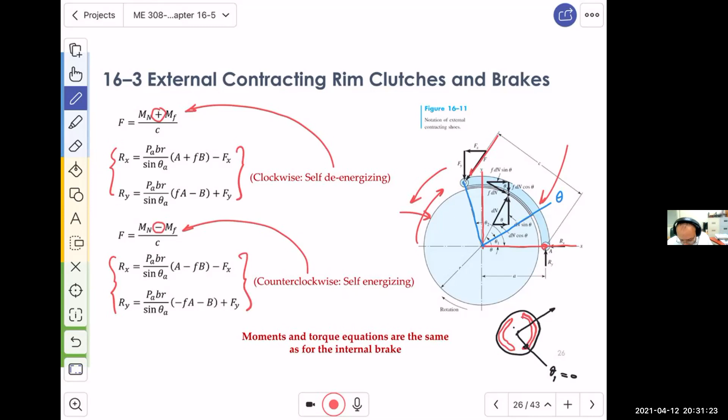Now let's go to this interesting problem. Looks very simple, very interesting, but it will teach you something very crucial. It says here: the block type hand brake. This is a hand brake, and as you see, you'll probably imagine this is your hand and you are pushing downward.

In the figure, it has a face width of B equal to 30 millimeter, and a mean coefficient of friction F which is 0.25, for an estimated actuating force of 400, so F equals 400 Newton. We want to find the maximum pressure on the shoe and find the braking torque. So basically we want to find PA and we want to find the torque. Of course, all dimensions here are in millimeter.

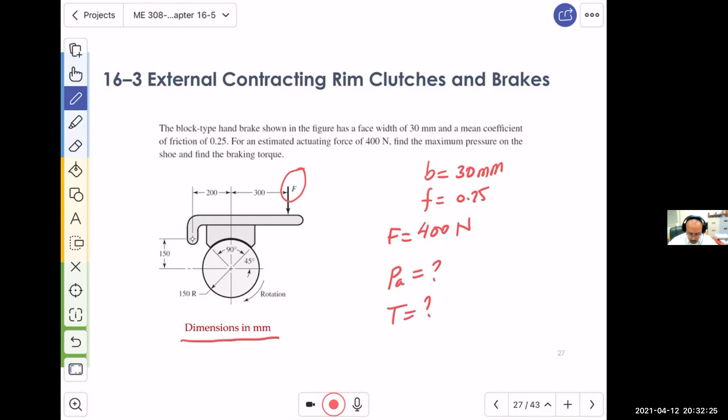So what I want you to understand is the following: we want to find, if we have F known, C can be measured from the geometry, and we know MF and we know MN, which are going to be functions of the maximum pressure. We will probably be able to find the pressure from this relation.

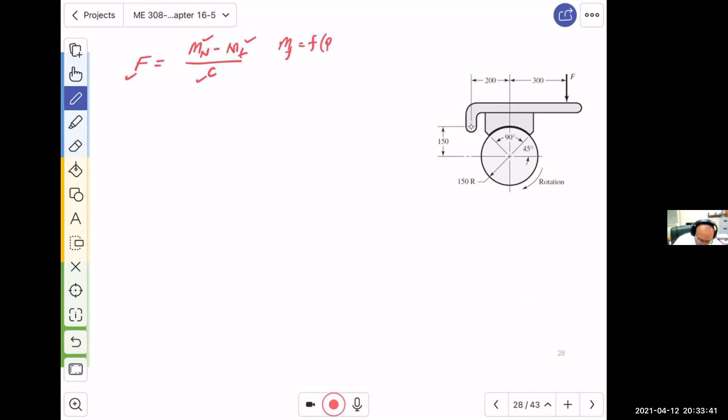So basically we can imagine that F is equal to mn minus mf divided by c. Then if we know mf, mn, c, and f, such that mf is a function of PA and MN is a function of PA, then we can find PA. Once we find PA, we can find the torque. There's no big deal about that. This is how we are going to plan the solution.

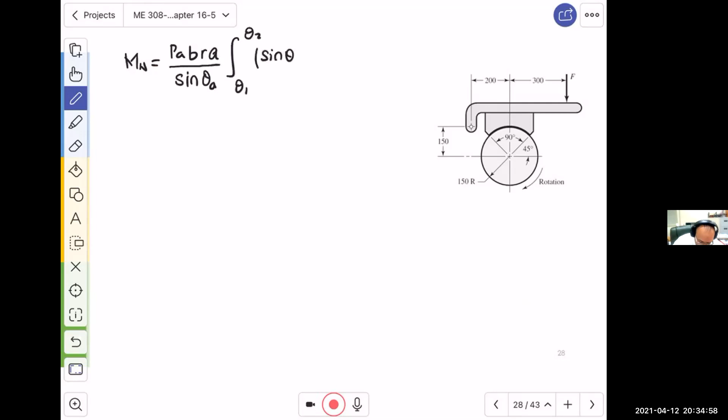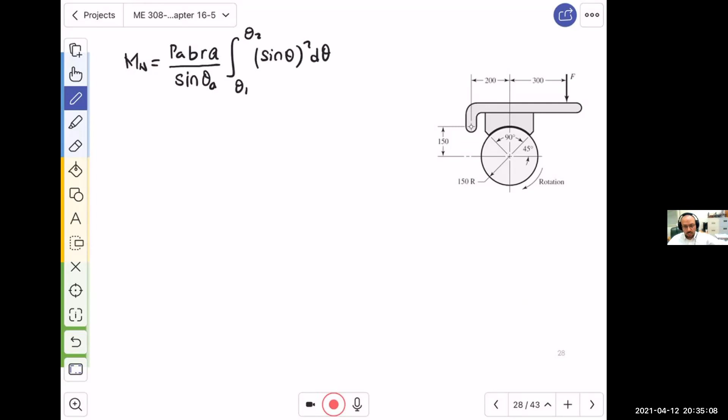Now, in the slide, I gave you the solution for this expressed as: this is equal to PA, B, R, A divided by sine theta A, and then this is equal to theta over 2 minus 1 over 4 sine 2 theta, evaluated from theta 1 to theta 2. Now, in the solution that I am going to provide, it was expressed automatically by integrating this, not by evaluating this, which is the same, right? It's the same.

Now, what is MF? MF is equal to F, the friction coefficient, PA, BR divided by sine theta A, and then the integral from theta 1 to theta 2 multiplied by sine theta multiplied by R minus A cosine theta d theta. Again, in the solution, you will see that we are going to express this in terms of the integration, which is not a problem. Now, the distance A — I ask you to think about it — is basically the distance from the pivot all the way to the center.

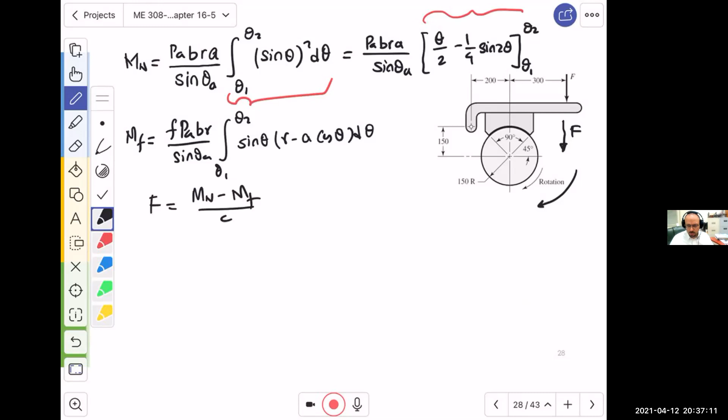This probably answers the question in your mind when I said F equals mn minus mf divided by c. Some of you might ask why I assumed it's minus when it looks like plus. It's because here we have a self-energizing system. If the force is on the other side, we would have a self-de-energizing system.

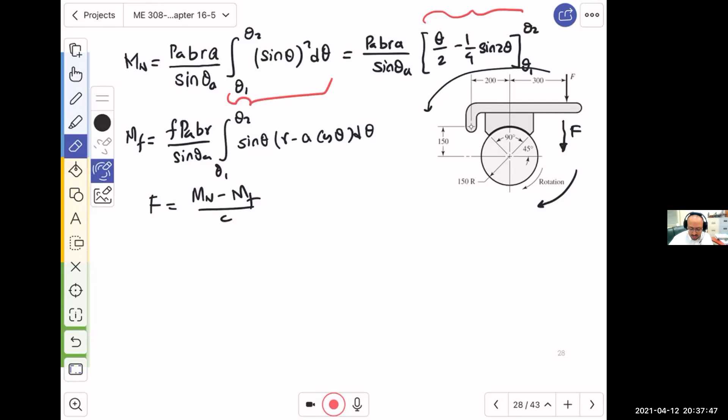Now let me clean all of this up. I want you to focus on what I'm going to show you next. I'll clean this and look at the integration limits. Whether you solve it by substituting the integral right away or by integrating first doesn't matter. What matters here is what is theta 1 and what is theta 2.

If you relate this to what I said, that the coordinate system must be oriented such that x passes through the pivot, then the coordinate system will look like this. This is x, and perpendicular to it, I will have y.

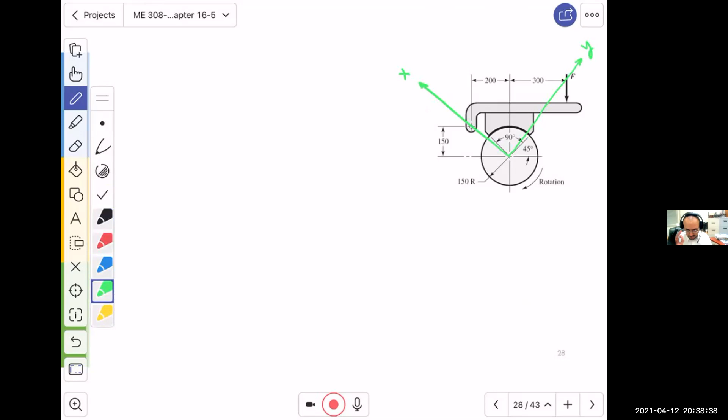I think you see where I'm getting to. It wasn't a coincidence that in reality theta 1 will be right there, with a little gap in between, and theta 2 is right there.

So the common mistake is someone will assume, as usual, that this is x and this is y, and say theta 1 is equal to 45, then theta 2 would be 45 plus 90, which is 135. So by mistake someone will think this is 135, which is wrong.

So now let me clean this yellow one, we don't need it. The green one is our coordinate system. So what is this angle then?

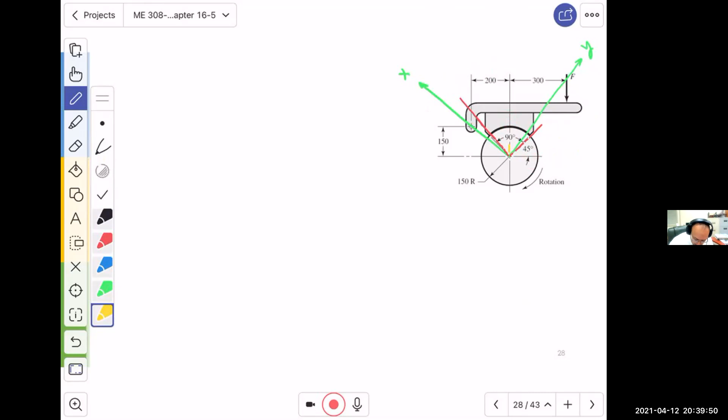If I know this angle, let me clean it up again and look at it. If this is 45 and this is 90, and this line is 180, how much is left? 45. So this must be 45. Now the green line will pass through here.

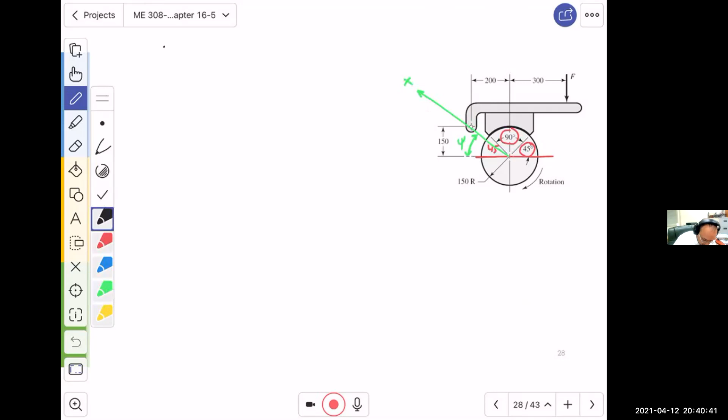So what I can say, if I find this angle, which let me call psi, and this is x, then theta 1 is equal to 45 minus psi. Isn't that true? I have the 45, I take from it that green angle, and what's left is this little distance from the green line all the way to the line of the first shoe. So theta 1 equals 45 minus that.

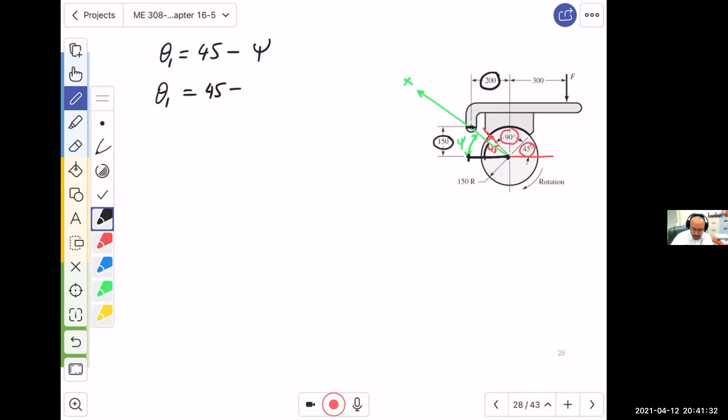So how much is this? Look carefully: this distance from here to there is 200, and the distance from here to there is 150. So tan psi equals 150 divided by 200. In other words, to find psi I take the tan inverse of 150 divided by 200.

If you do this, you end up with theta 1 equal to 8.13 degrees, that little tiny angle from x. So what is theta 2? Theta 2 will be 8.13 plus 90. That 90 is encompassing the shoe, but because we're measuring from the green x-axis, we need to add that 8.13.

So theta 2 is going to be equal to 98.13. That's it, this is very important, very important. So what is theta A? It is 90, that's a long shoe. So it is 90 degrees, and thus sine theta A is equal to 1, which is very helpful.

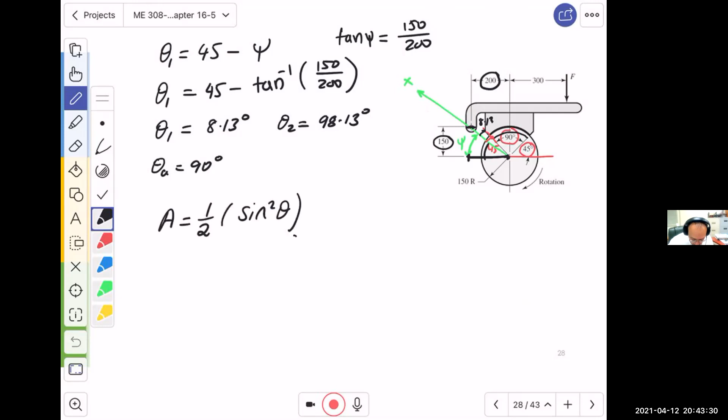Now, I told you the solution I'm going to show you is expressed in terms of the integral. So what did we do? We say A here is equal to 1 over 2 multiplied by sine squared theta, and then we evaluate this from 8.13 to 98.13, which is equal to how much?

What is C as a variable? It is the integral of theta 1 to theta 2 for sine theta d theta, which is equal to minus cosine theta, evaluated from theta 1 to 98.13, which is equal to 1.1314. You may ask, what are these, and where am I going to use them?

What is this? Let me quickly bring up the equation for you. Just give me one second, I'm pulling it out here from my note. So I want to remind you that MF is equal to F PA multiplied by B multiplied by R divided by sine theta A, and then multiplied by the integral from theta 1 to theta 2 of sine theta, and then sine theta is multiplied by R, minus A cosine theta d theta.

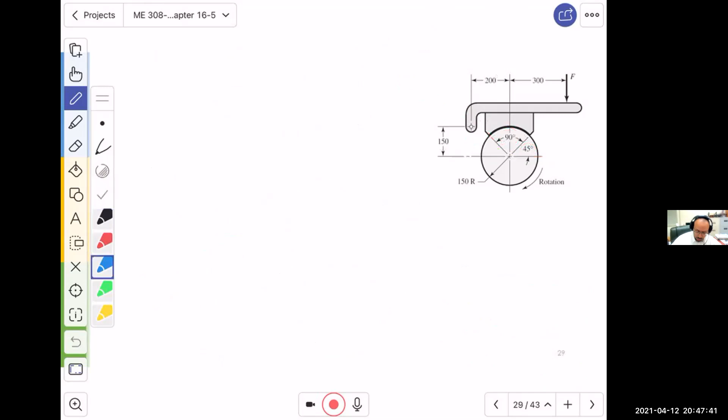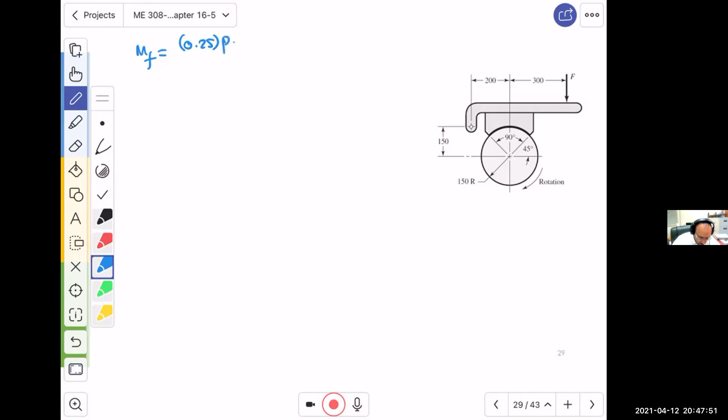Well, if you do this, and then you substitute, let me go here. Then I will get MF, which is equal to 0.25, that's the coefficient of friction, multiplied by PA, which is unknown, multiplied by B, which is 30 millimeter, which is 0.03 meter, multiplied by the radius. What is the radius? 150, so it is going to be 0.15. Divided by sine 90, and then we multiply it by R and by A.

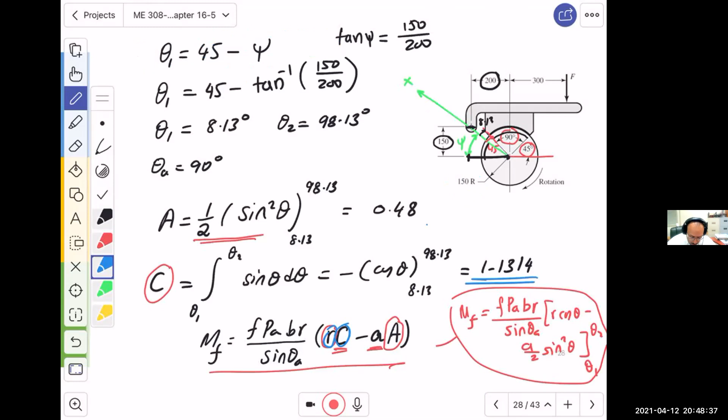So what do we have? If you recall, we said RC, C is 1.1314, and A is 0.48. So we will have R, which is 0.15, multiplied by C, C is equal to 1.1314, and then minus 0.25, which is, this is something you should not know yet, which is A, we did not calculate yet, multiplied by capital A, which is 0.48.

Now the question, what is A? If you recall, we said A is the distance between the pivot all the way to the center. Where is the pivot? It is here, that's the pivot. Where is the center? It is here. So you need to go and connect these two, and that's A.

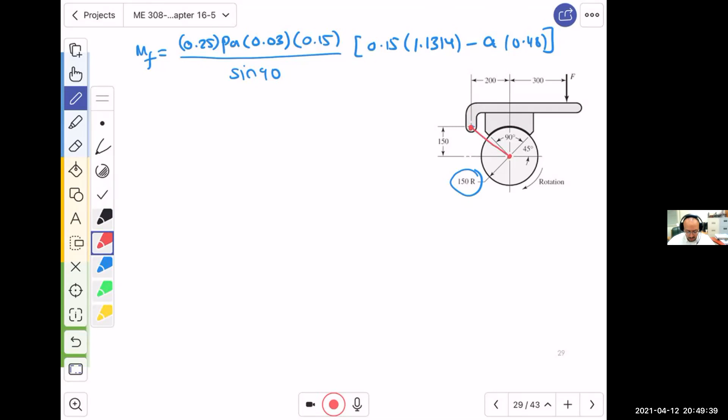So what is this? This one again is coming from 150 and 200, and it is the hypotenuse. So A indeed is equal to the square root of 150 square plus 200 square, and this is where I told you when I was explaining it, there is a 0.25. So the 0.25 is actually coming from this. This is 250 millimeter, which is 0.25.

So if I do that, what would I get? I will get MF, which is equal to 5.59 multiplied by 10 to the power minus 5, multiplied by PA, in Newton meter. Yeah, it's a Newton meter, it's a moment, and there is a pressure inside it, which is PA.

So what should I do? I should go to MN. MN has a parameter, which I'm going to call B. This is the same one as the one I showed you earlier, which is theta over 2 minus 1 over 4 sine 2 theta.

So what do I have to do? I have to substitute this, but be careful. I need to substitute theta as 8.13 divided by 180, just to remind you, because this has to be in radian. You understand? Or maybe you will make a mistake in the calculation. So let me tell you this. Maybe I should not do that, and I should do this instead.

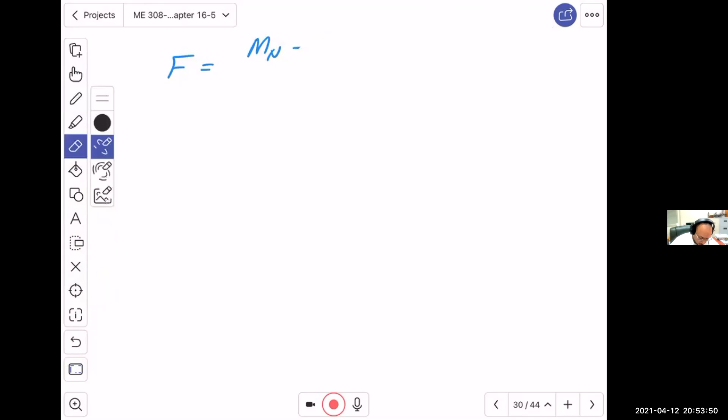Good, ya akhwan. I think I ran out of pages, so I'm going to add one over here. So what I'm going to do now, because, as I explained, this is a self-energizing brake. So I will have F, which is 400 Newton, equals to Mn minus M, where this M is Mf divided by C.

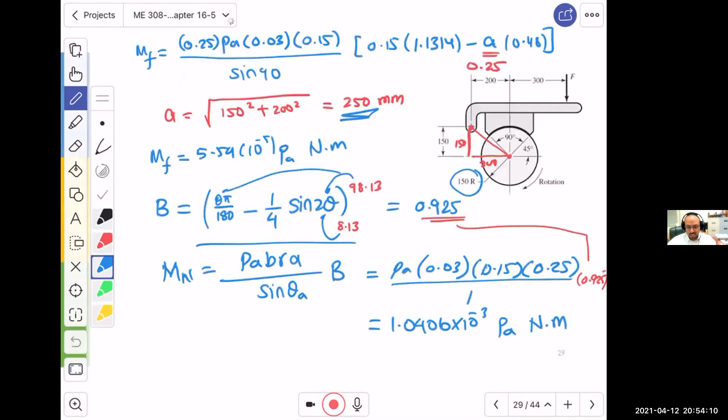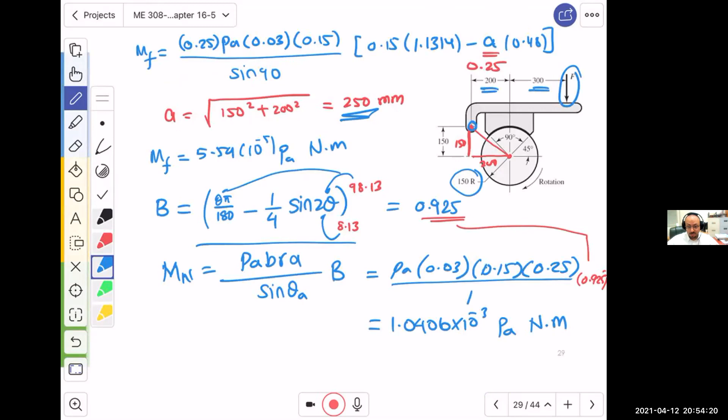So I have 400, which is equal to 104.06 minus 5.59, divided by C. Let's go and see what is C. C is the distance from the actuating force to the pivot point, which is 300 plus 200, so it is 500 millimeter. And if I divide it by 1,000, it's going to be 0.5.

Don't forget, this one and this one need to be divided by 10 to the power 5. That's why we have 10 to the power minus 5 in there. So when it is down, it's like dividing by 10 to the power 5, multiplied by pressure PA, which will give you the first requirement, PA equals to 203 kilo Pascal. That's the answer. Good, ya shabab.

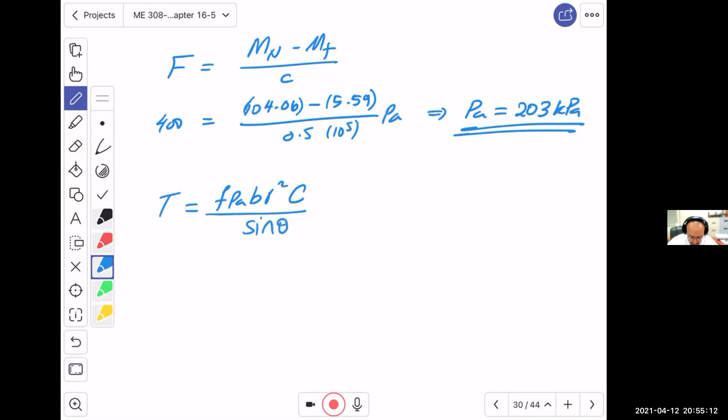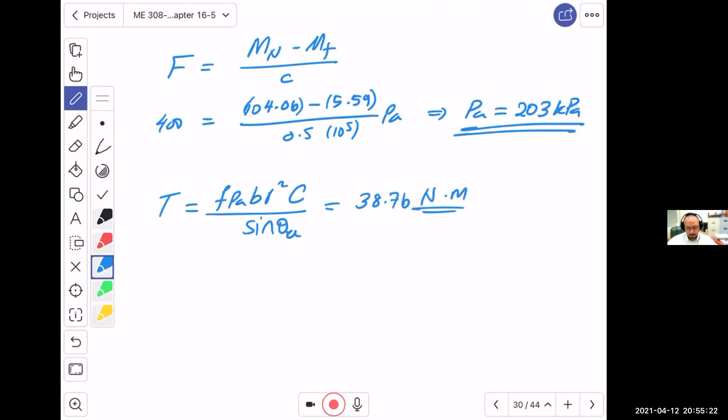So what is the torque? The torque equation is F, PA multiplied by BR squared multiplied by the C factor I calculated, over sine theta A. And if you substitute everything, because you know everything, you will get a torque of 38.76 Newton meter. Okay, that's it, ya shabab. So this is the solution. This is a problem from the textbook, but it is really an interesting one.

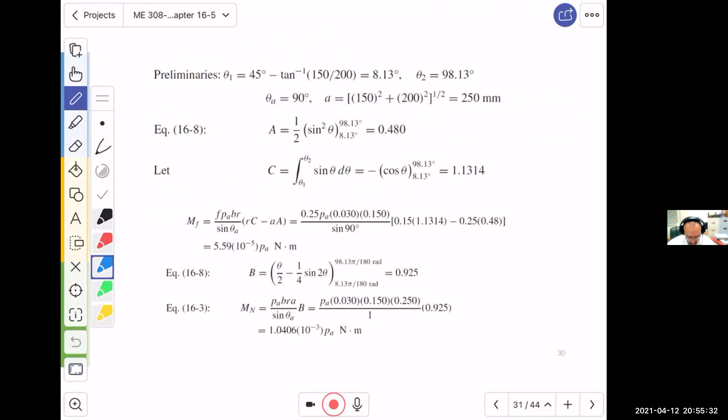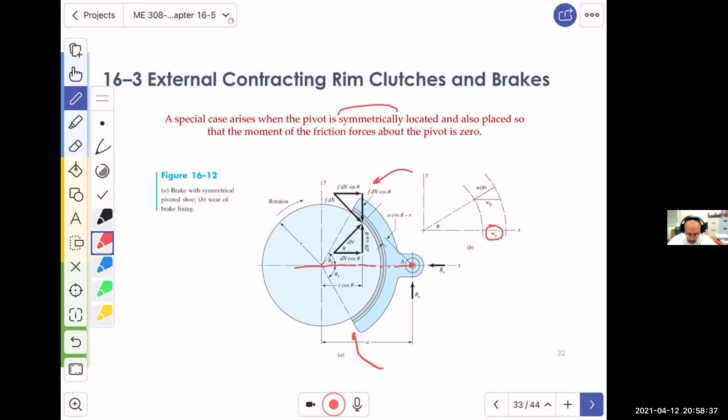And so what happened is this. We will also realize that this symmetry is going to result in an equal wear along the radial line. Yeah, so along an angle, you have the same pressure because of this symmetry, and then the symmetrical pressure, and then you get the same wear. So that's why the wear analysis of this kind of brake is interesting, and this is what we are going to talk about.

So if we assume that the wear along the radial direction, as a function of theta, is w theta, and w0 is the horizontal component of the wear at all positions. So at any position, let's say you pick this arbitrary position, the wear along that position is w theta. But if you measure the wear along the horizontal, it's just like a vector, it is w0.

So this is the horizontal component of the wear. K is a material constant, similar to what we did with the journal bearing when we studied their wear. K is a material constant defined as the wear factor. P is the pressure, V is the rim velocity, which along the rim is the same, because this is related to the RPM, so any point along that rim has the same velocity. T is the time.

So we can have an expression. I'm not going to go through the derivation, which relates the pressure distribution at any angle equal to the horizontal component of the wear, W0, multiplied by cosine theta divided by K V T.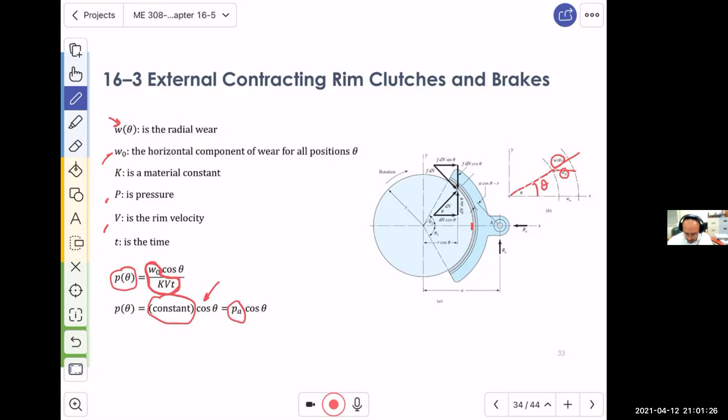So it can be shown that this can be related to the maximum pressure. And by doing so, we can now express the reaction forces at the pivot as well as the torque.

What is important before we do this for this special case is that the distance A, from the center as usual to the pivot, is chosen by finding where the moment of the frictional forces MF is zero. That's what we said, that MF becomes zero. You have to be very careful because mislocating the pivot point makes MF zero about a different location.

Once MF becomes zero at a different location, the brake lining, which is the shoe material, will adjust its local contact pressure through wear. It will tend to wear in an unsymmetrical way to compensate for that shift because it is imbalanced right now. That unsymmetrical wear means the shoe will have to be retired.

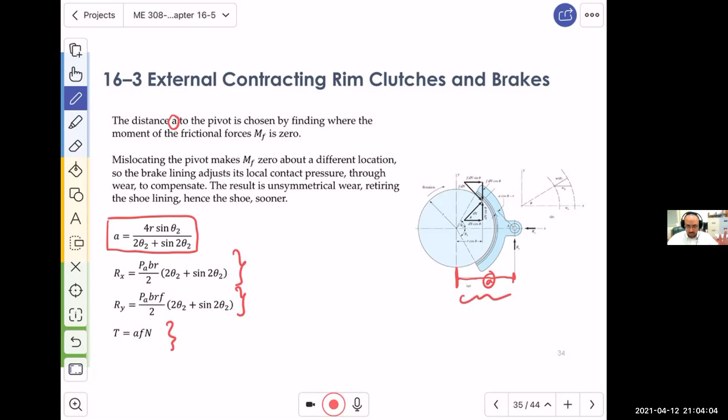So what are we going to do? This is the last part of this lecture, moving to another type of clutching and braking, which is flexible clutch and brake bands, used in power excavators and hoisting and other machinery. So don't think that such a braking system is not used or not very common.

In this system, what I want you to understand is that we have a drum which is rotating, and there is a pivot, in which we put a cable surrounding this drum. And what happens is that while the drum is rotating, this cable will stay in touch. The moment you want to push on the brake, all you need to do is push P2.

Now why do we have P2 and P1? That's the question, right? Well, very simple: because P2 is what you think you are applying. But when you apply that force downward, this band will push against the drum and it will try to rub against it to stop it.

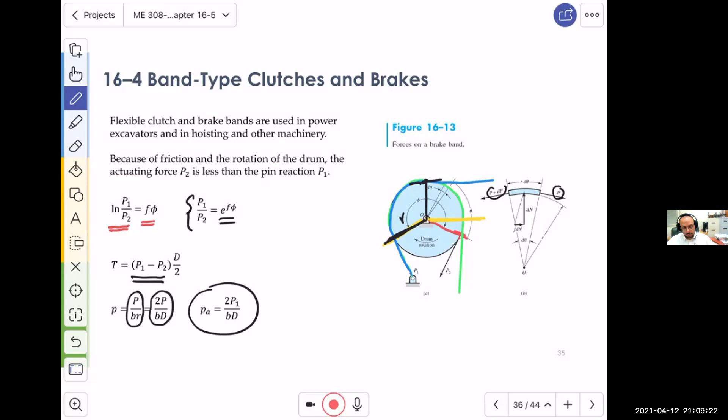So in this example, which will be a short one, if we have this arrangement given in millimeters: we have a drum with a diameter equal to 250 millimeters, and the drum is acted upon by this brake band system, which is pivoted right here. That's the pivot. This distance from here to there is 200, and the actuating force - presumably you are the one pushing this down. Remember, when you push down, this rotation is going to slow down. That's what happens. How far is this? This is 275 from the cable.

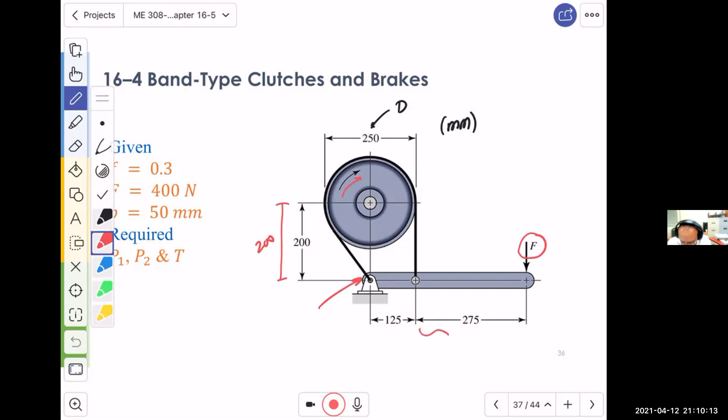Remember, this is P1 and this one is P2, correct? And the distance from this point where the cable is being pushed to the end over here is 125. So what were we given? The friction coefficient is 0.3, the actuating force here is 400 Newton, and B, the width, is 50 millimeters. What do we want to find? P1, P2, and the torque. So let me show you how we are going to solve this.

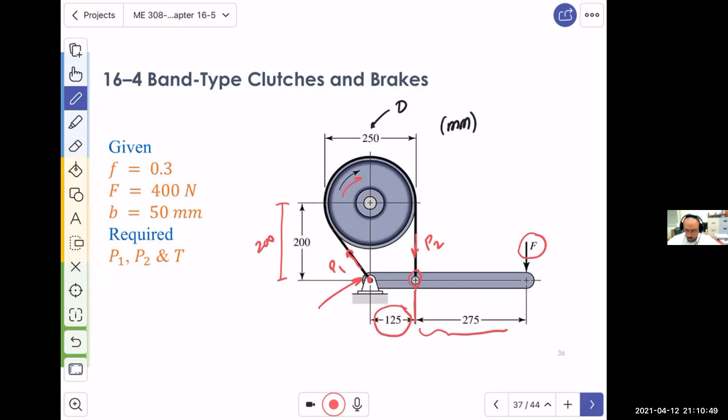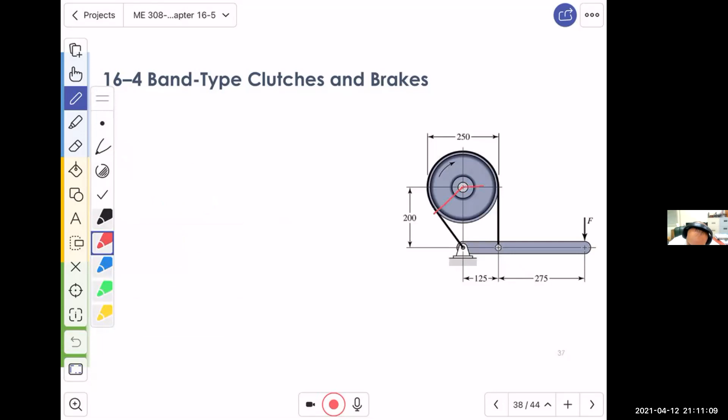The first thing you should understand is that the angle which covers phi is this - it's going to be, clearly, this until this - this is phi, correct? Now the question is, what is this angle? We know that this is this one - how much is this angle?

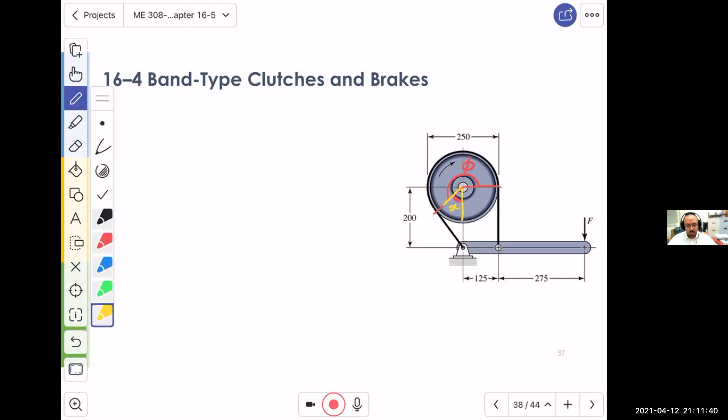So in the solution, we are calling this angle alpha, and let's call this one beta. So alpha plus beta is equal to 90. If I find alpha, I will know beta, and then I will add this beta to 90 and I will find phi, correct? So how can I find this?

Listen carefully. First, you should know from geometry that this is the tangent. And if it is the tangent, the radius from the center to the tangent makes a 90 degree angle, correct? So this is a right triangle, very simple, right? And it is a right triangle with this distance equal to 200, and this angle is 90.

So what is this distance, ya shabab? Let me clean it up. This is very important. I put a geometry over there, let me show you this clearly. This is the radius, this is angle 90, and this is 200. And this is my triangle.

Now what is this distance? 200, the same as this one. What is the other one? The other one is half of the diameter. If the diameter is 250, then this one is 125.

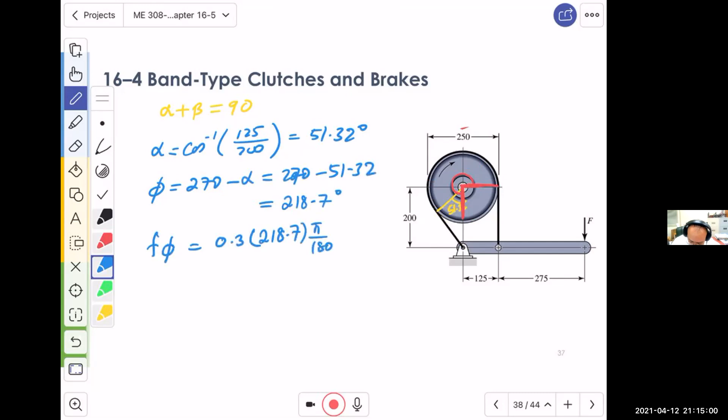It is, how much was the friction? 0.3 multiplied by, be careful, 218.7 multiplied by pi over 180, and this is going to be 1.145. Remember, whenever you multiply degrees by numbers, friction, length, then they must be in radians.

So what happened is, if you take the moment about point P1, this is P1, this is where the tension P1 is, and you say this equals zero, what do you end up with? You end up with this one going in this direction, and with this one acting upward, going in this direction. Is that correct? Be careful.

Be careful, let me repeat this again. I don't want you to misunderstand it. If I cut the cable, what would I get? The cable here, in red, will have a force downward. So the one opposite will have a force upward.

So in reality, this is the arm, this is the point where I'm taking the moment. I have F, which is acting downward, and the green one, which is acting upward, P2. So I end up with F multiplied by 125 plus 275, which equals, because there are only two moments, equal to each other, equal to P2 multiplied by 125. So what is P2? P2 is going to be equal to F multiplied by 125 plus 275, divided by 125.

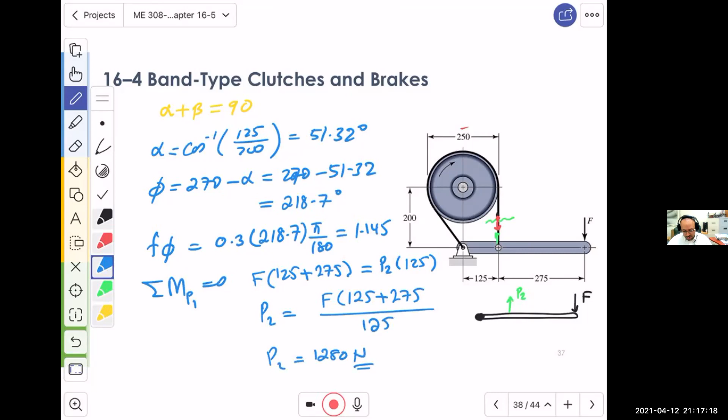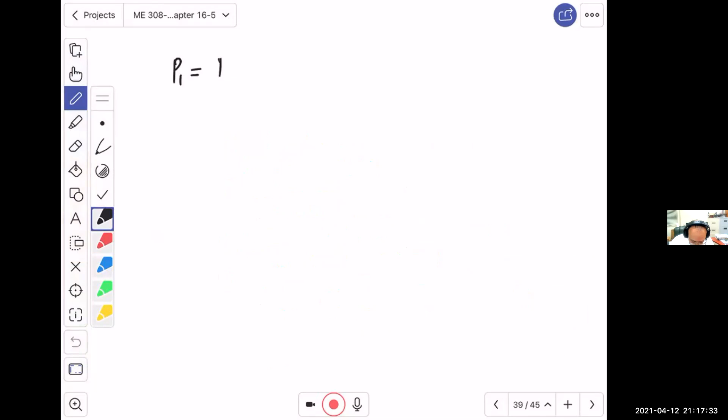And this gives you P2 as 1280 Newton. Now the question, what is P1? So P1 is going to be, oh I have the solution right away, let me add another slide. So P1 will be equal to P2 multiplied by e to the power F phi. I know everything.

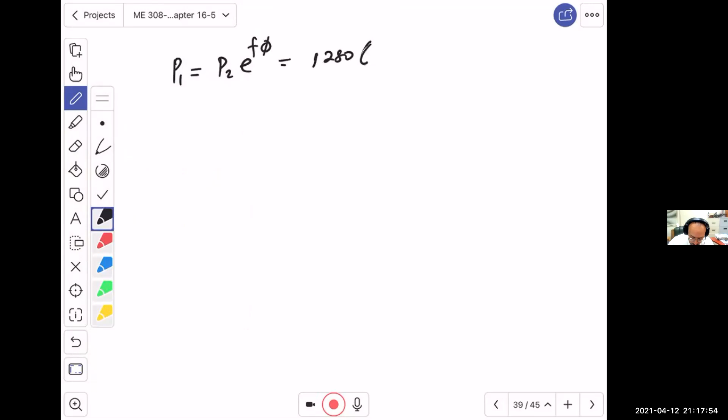So I have 1280 multiplied by the exponent of F. By the way, we found F phi, right? And from the previous slide, F phi was equal to 1.145. So how much is this? Oh I'm sorry, shabab, this isn't the exponent, this is only the power. So I need to clean this. So it is equal to e to the power of

1.145. And how much would I get? I will get, ya shabab, listen to the number, 4022 Newton. That's a lot compared to P2.

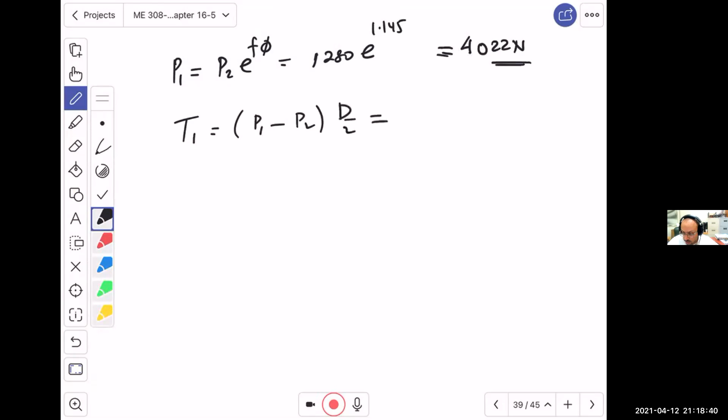So what is the torque? Torque is equal to P1 minus P2 multiplied by D over 2. And this gives me 4022 minus 1280 multiplied by the diameter, which is 250 over 2. And this gives you 342,750 Newton millimeter, or basically 342 Newton meter.